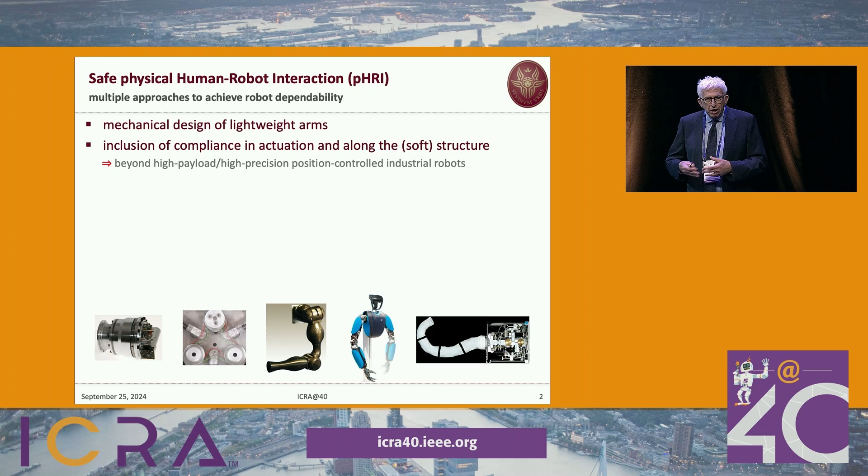Over the years, as robots started going out of the cages of industries into homes or service applications, there have been many attempts to make robot behavior safe. We can list mechanical design of lightweight arms, a few examples below, inclusion of compliance in the actuation, even variable stiffness actuation, and along the structure a soft structure. By and large, all these activities were moving the traditional way of looking at robots—position control, high payload, high precision—to a more compliant, more natural behavior.

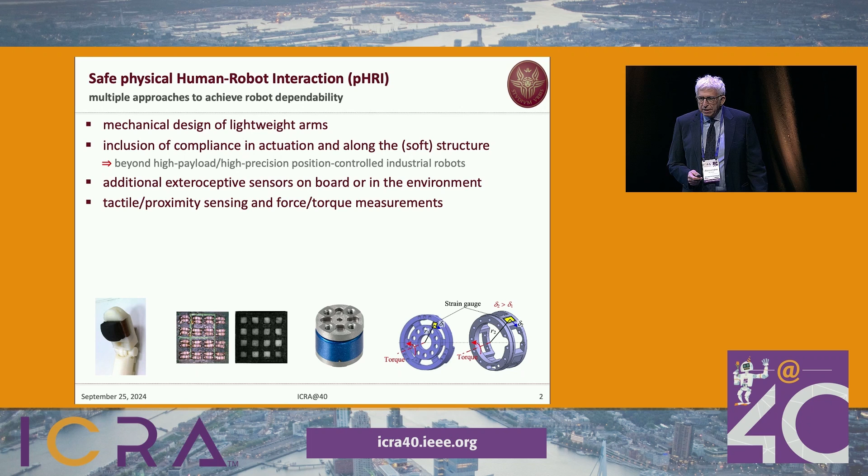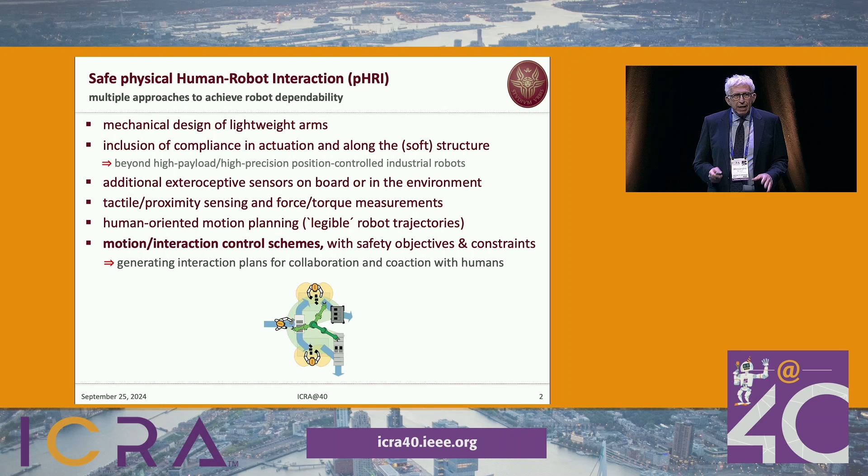If you want to live in an unstructured environment, you need exteroceptive sensors on board or in the environment. If you want to touch the environment with a robot or a human, you need proximity or tactile sensors and force measurement. You can integrate all of this in your system. Another important fact is the planning of legible motion—this is an activity done very well by CNRS LAAS—so that the human can understand what the robot is doing. And this is what I'm going to talk about today: motion interaction control schemes.

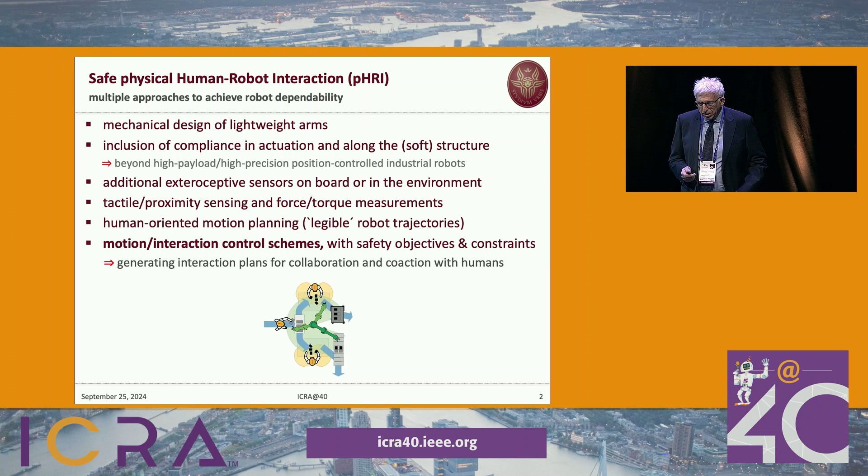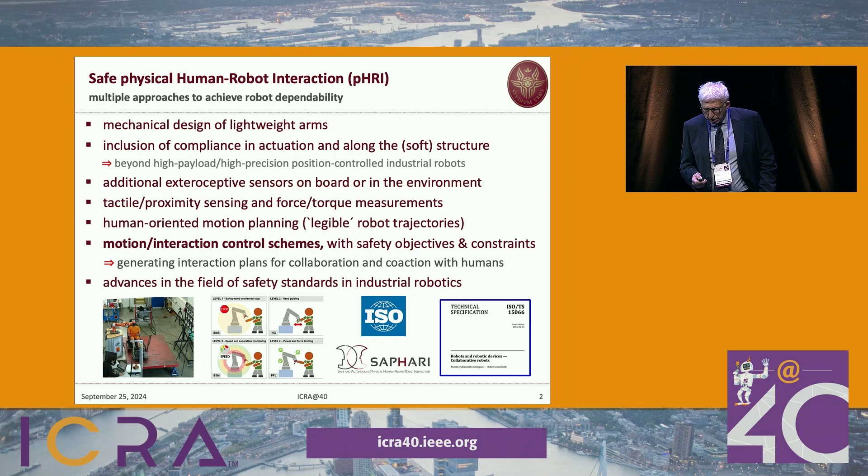Of course, there are techniques that include safety constraints and safety objectives. I will do, let's say, conventional engineering stuff, hopefully good enough for solving our problems. I must say also that over the years there have been advances in the definition of safety standards which allow the robot to interact more closely with humans, and the SAPHARI activity produces some contribution on that.

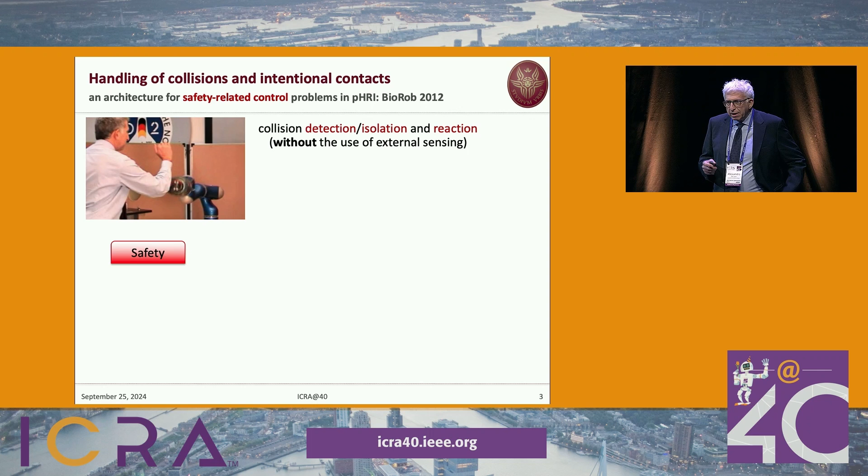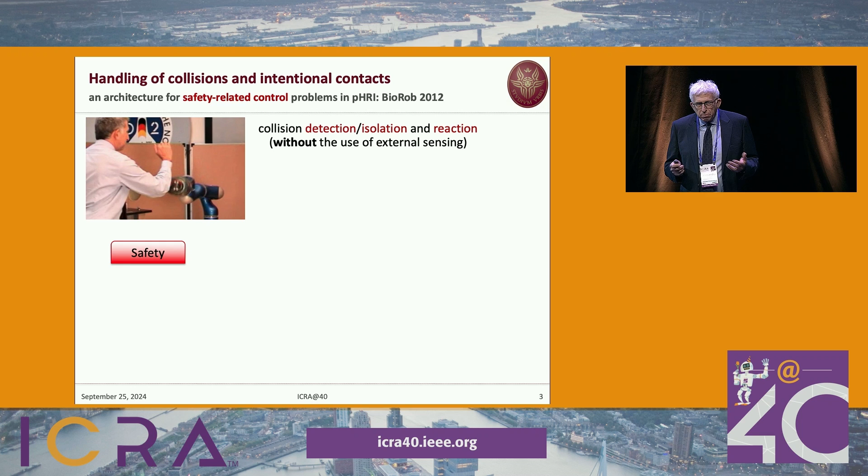Over the years we've set up a control architecture handling three different problems related to safety, which for us are really control problems. First of all, safety is very important, which for me means being able to detect collision as soon as possible, to isolate which link has collided with the environment, and then to activate a reaction of different kinds. We would like to do this without external sensing—only the position sensor could be used in this case.

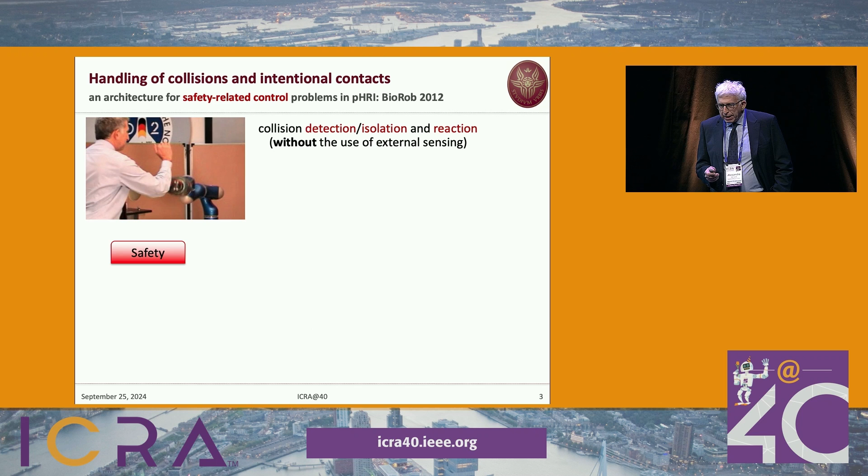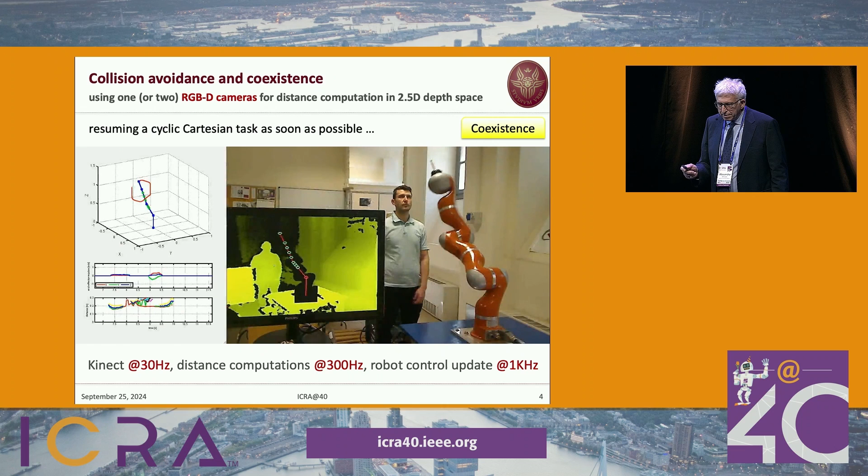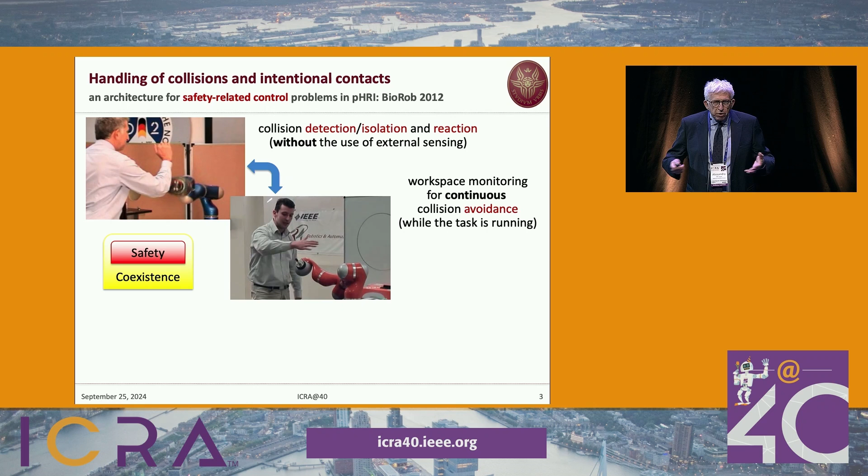Now the second aspect—sorry, there's some delay—the second aspect is what we call coexistence. So 90% of the applications of collaborative robots in current industry, at least in Italy, are concerned with coexistence: robot and human sharing a workspace, interacting very little, like pick-and-place objects left by the robot and taken by the human. For this we need external sensing because we need to measure distances and do collision avoidance in the traditional way. So we call this coexistence. Of course, if we are focused on coexistence, we don't have to forget safety.

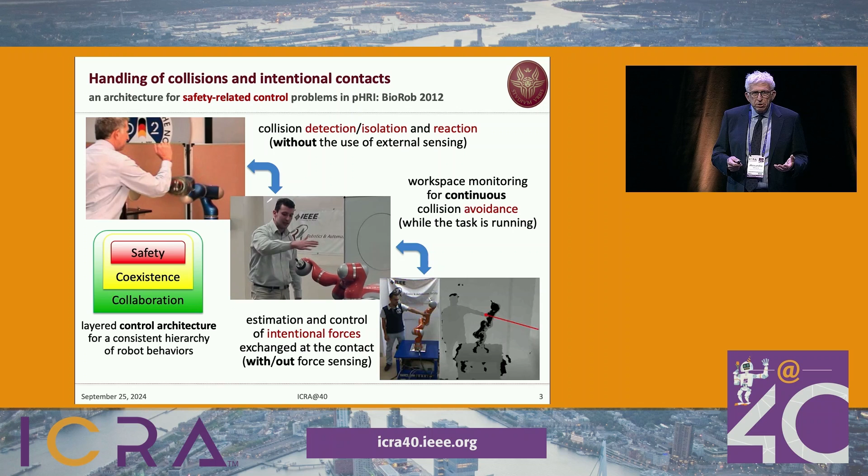In this sense, we have a hierarchical structure of architecture, because the next step is collaboration, when we really exchange forces and have to do this in a controlled way with the environment, with the human—with or without using sensors, as I like to sing, 'with or without you.' All this has been set up into a layered control architecture. Let's see some examples.

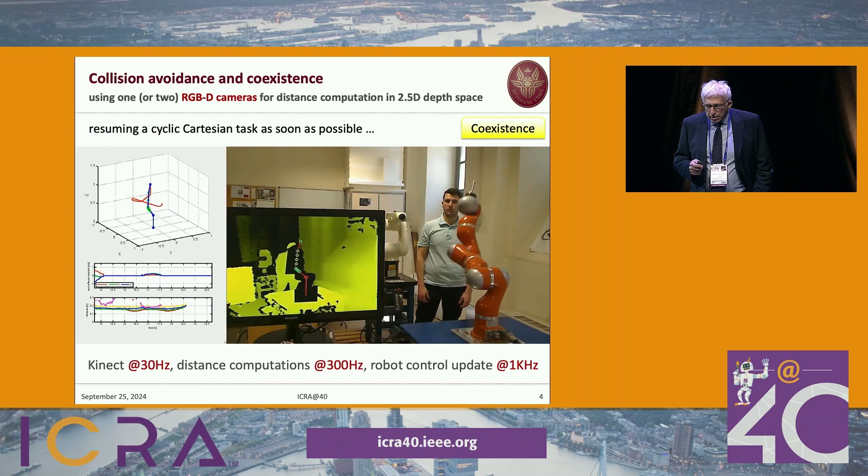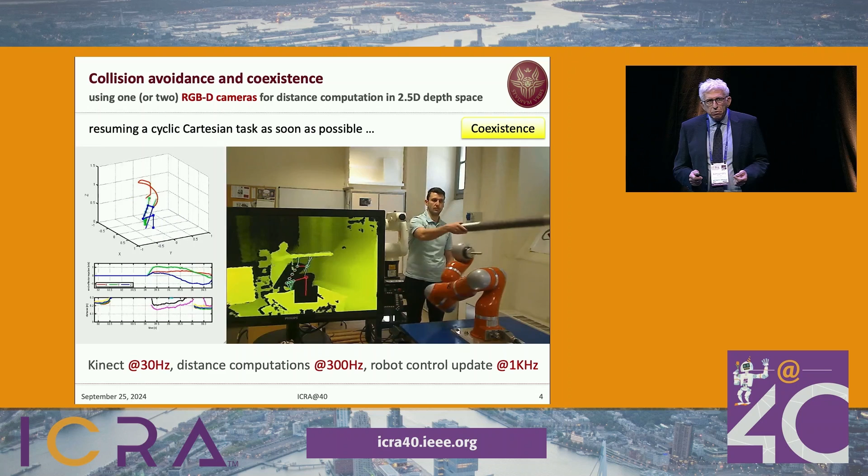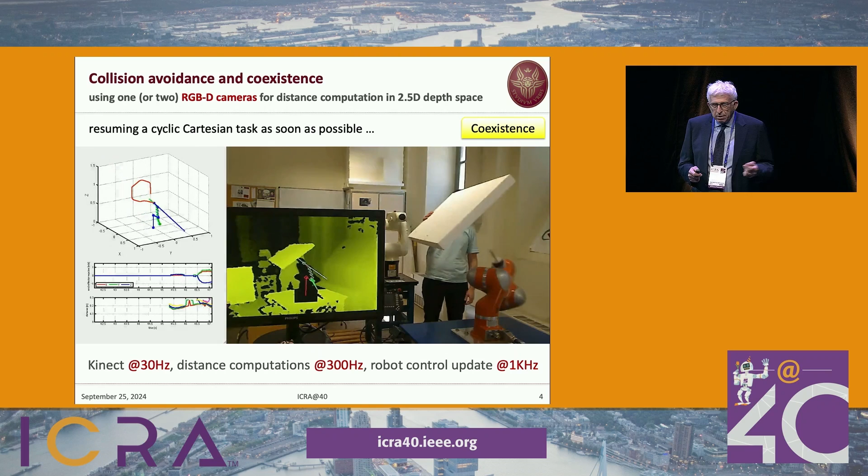For instance, for coexistence, this is work by Fabrizio Flacco—unfortunately he's no longer with us—doing experiments where the robot performs a cyclic task in the Cartesian world, and we use a Kinect, sometimes two Kinects, to limit the gray zone in the workspace. We do distance computation in the sensor space, so we don't build point clouds, which is why we can go quite fast, and of course we update the control law every one millisecond on a KUKA.

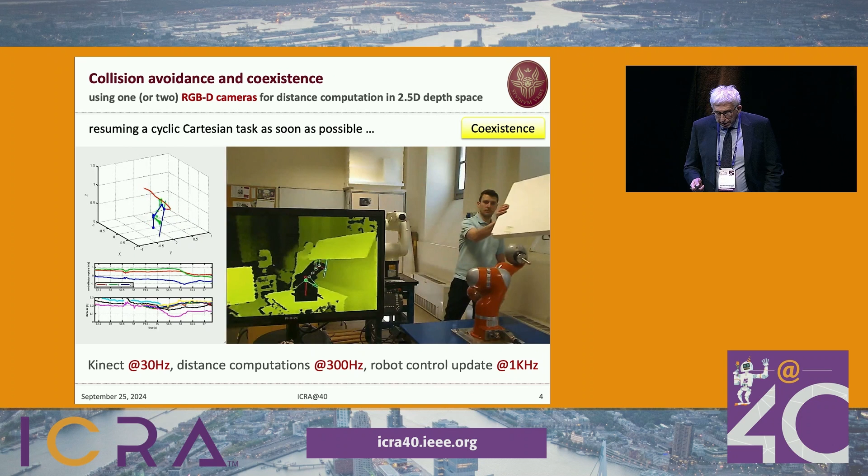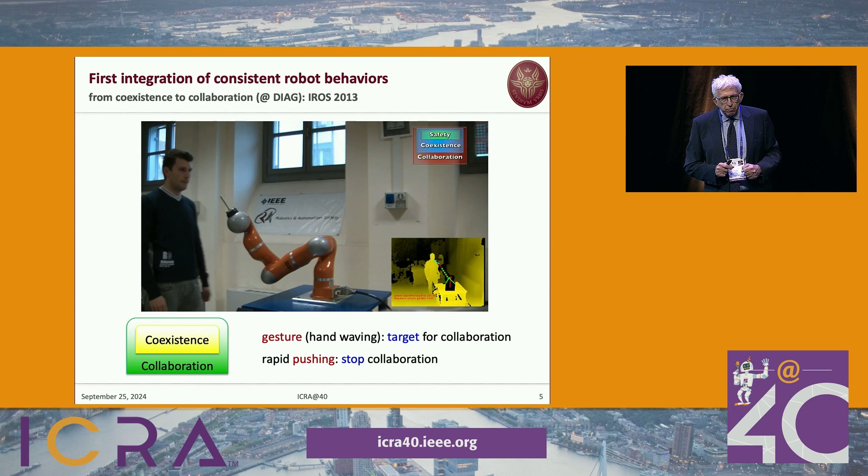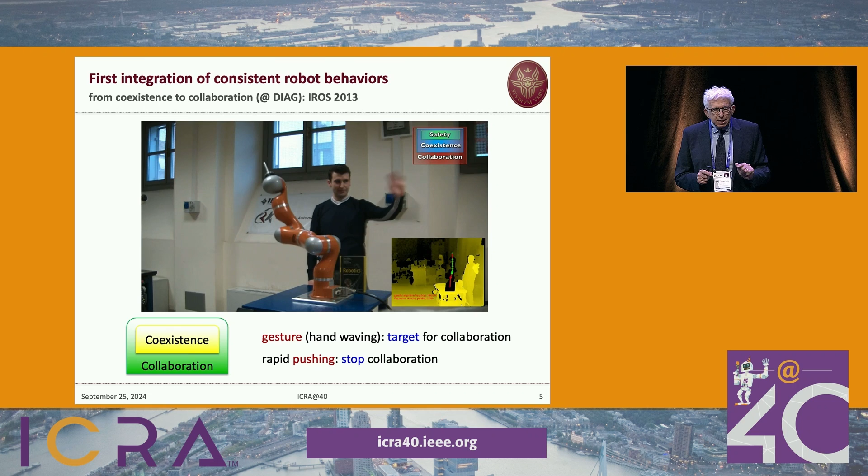So now if you want to see the integration of this with collaboration: here again, you can hold the end effector and control exchanged forces. Then you give a target, for instance doing a gesture or a voice command, and the robot goes to this target because it wants to collaborate. But coexistence is still important, so all other parts of the human body are avoided.

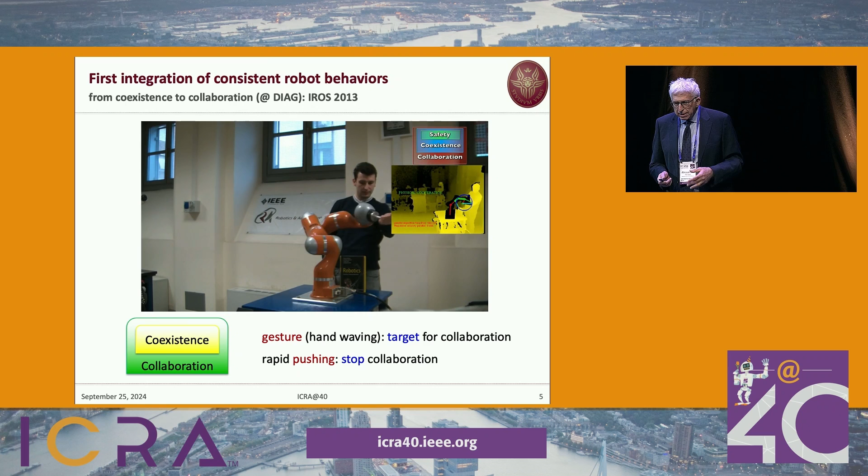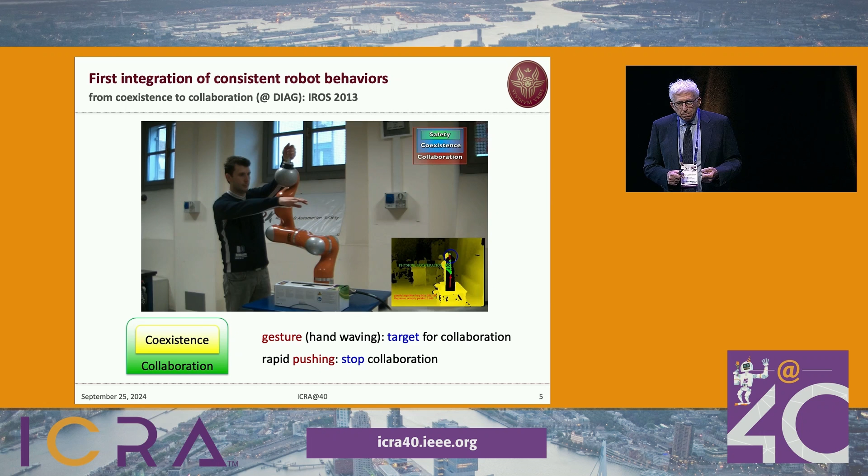And you can see this is done with the human body, but also with any other obstacle in the environment. I think the last part of this short video is more impressive, because Fabrizio is holding the tip and pushing against his arm, but the robot becomes stiffer and stiffer because coexistence should be preserved, and safety as well.

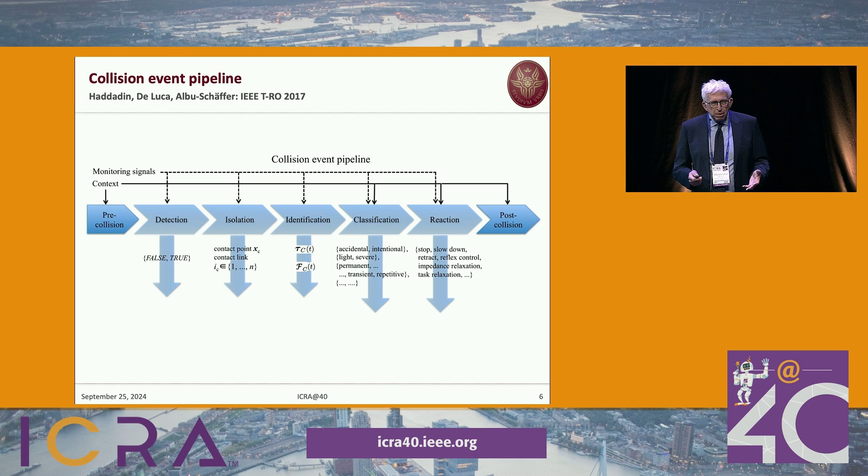So now talking about safety: in 2017, after many years of collaboration, we finally published this paper with Sami and Alin on TRO, giving this collision event pipeline. Safety here is detection, isolation, and possible identification of the exchanged force.

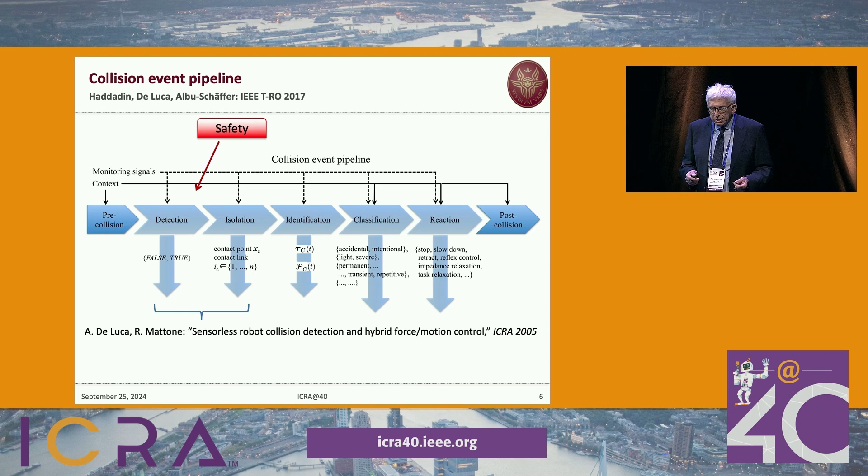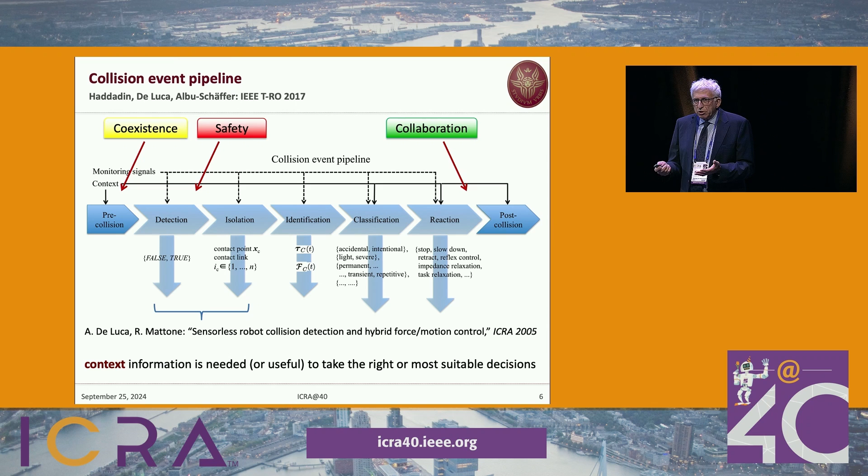The part related to coexistence comes before, and collaboration comes at the end, when the robot should react. Sometimes it just stops, sometimes it starts an active collaboration with the human.

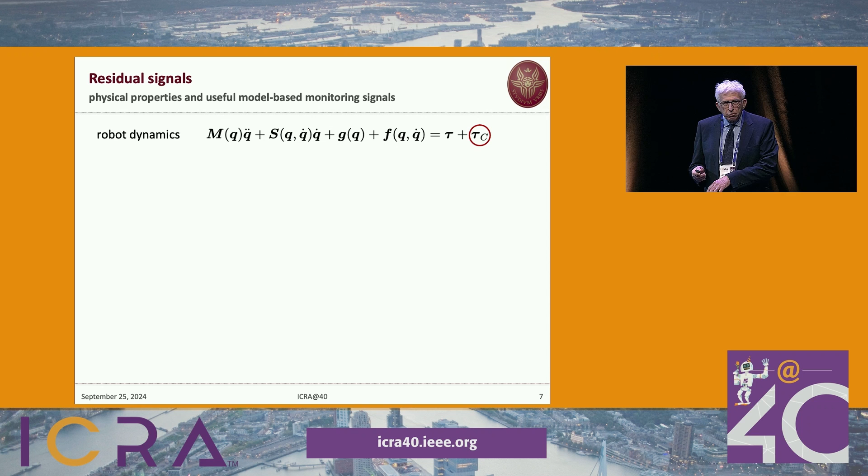So this is the only mathematical slide that I have. Robot dynamics is known to everybody. Tau C is the joint torque resulting from a collision, occurring anywhere at any time along the structure of the robot. We use two physically motivated signals: the total energy of the system, and the generalized momentum.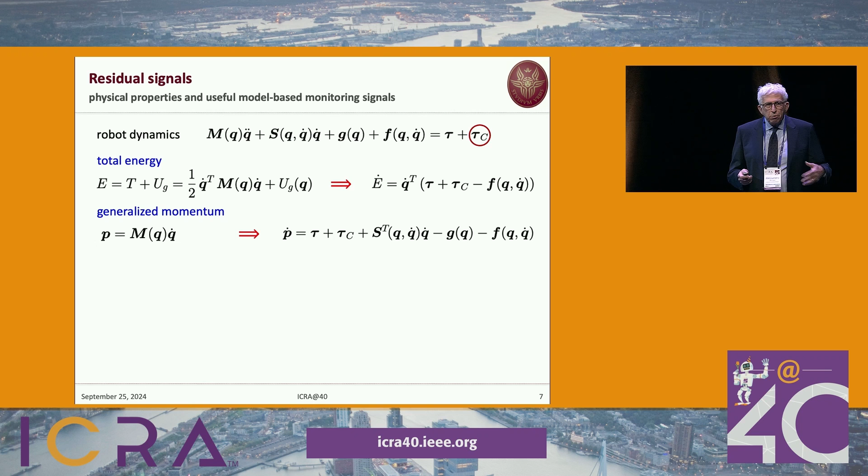Now you can write how these two quantities evolve. One is a scalar, one is a vector. Based on this evolution, you can design computable signals to monitor collision. The sigma is a scalar used for collision detection, and r is a vector residual used also for isolation. Their evolution is sensitive to collision.

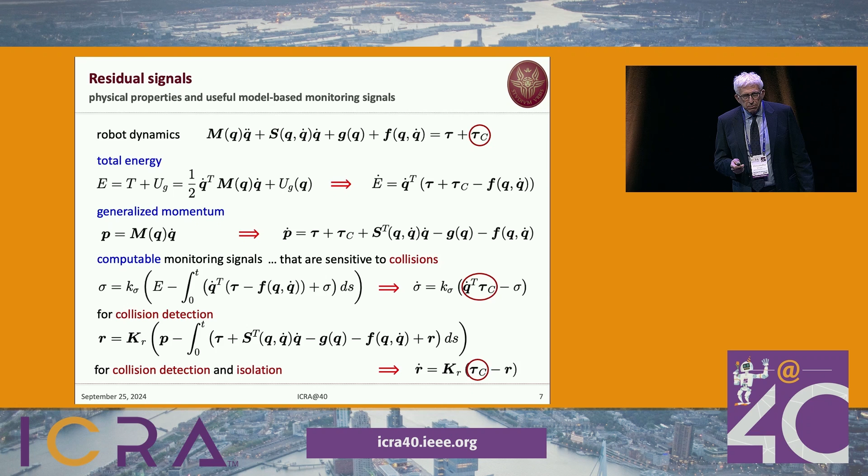With this, you can set up a behavior of the robot. You have a collision monitor always active, and you can detect or isolate, using both signals at the same time. When you overcome some threshold, the collision is detected, and you activate reaction strategies—there are many you can use. The nice thing about these signals is that if the contact is removed, they come back to zero, so you can continuously monitor a succession of contacts with the environment.

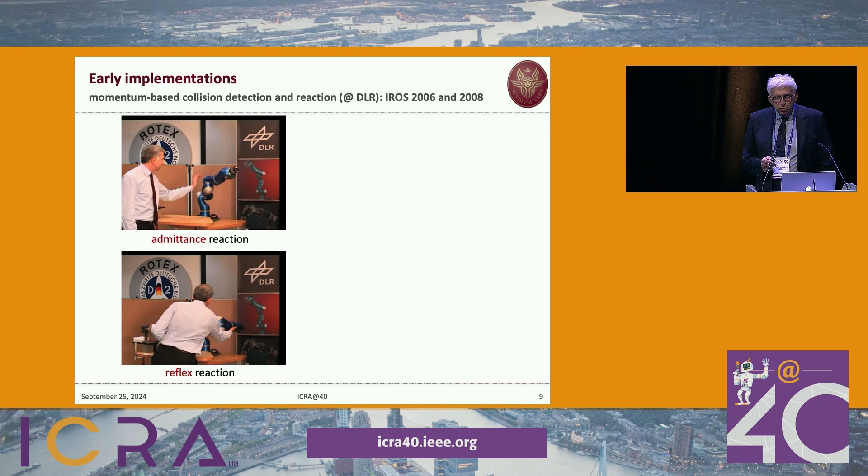So here is the first implementation of this type of idea. The first one was at DLR, during my sabbatical—these are the first impacts, with two different types of reaction. One is an admittance mode, where the residual is converted into a command in Cartesian space, a velocity command. The reflex reaction instead is a torque-controlled reaction.

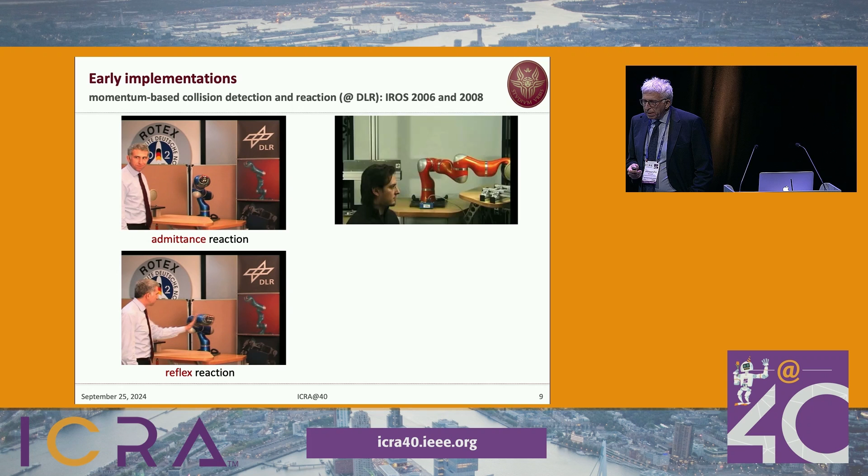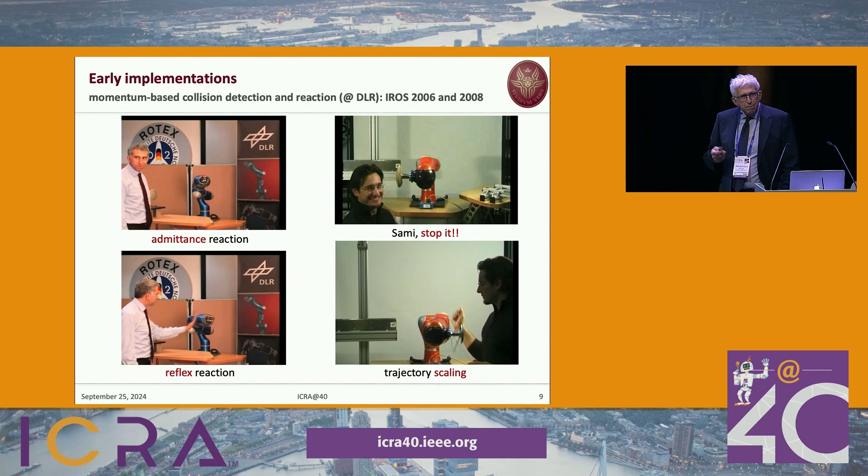And of course you are familiar with this famous experiment—Sami was very confident about the software. You can use the same techniques to evaluate, keeping the same path but scaling the trajectory. And if you push too hard, then you get a reflex and the system moves away.

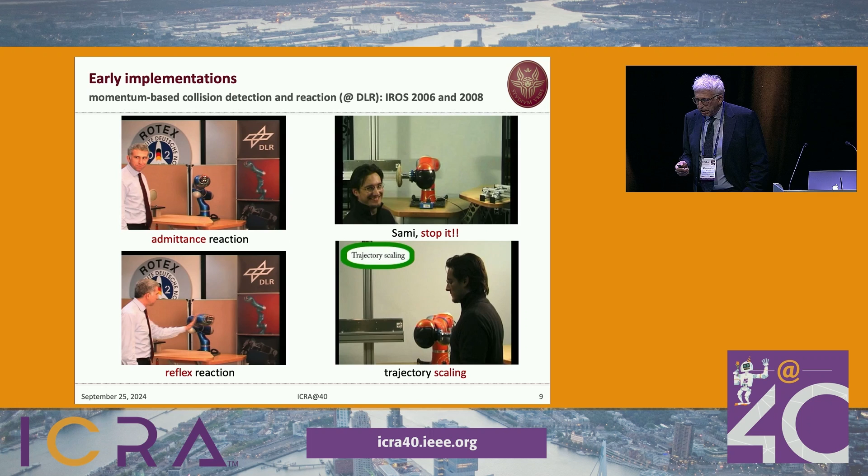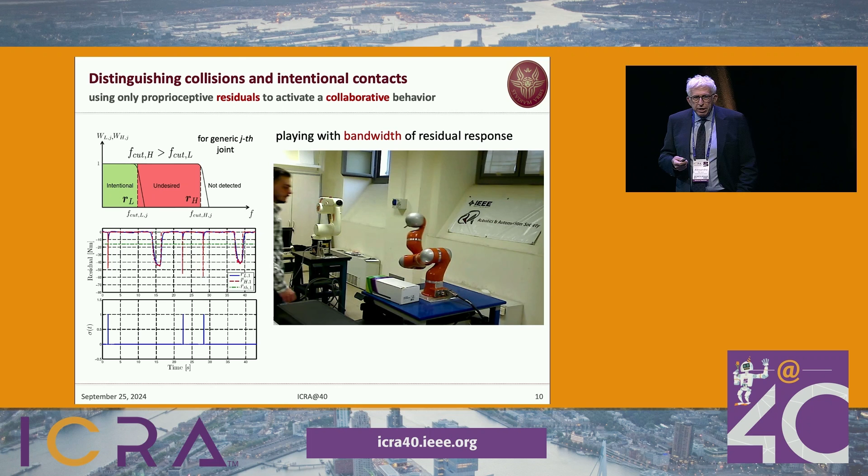Another important thing is to discriminate whether the contact is intentional or not, because if it's intentional it may lead to a collaboration phase, but if it's undesired, it's a collision, and the robot should simply stop or react as before. We did that by filtering the residual signal differently—a high band filter and a low band filter—allowing us to discriminate collision, where the robot stops and then resumes operation.

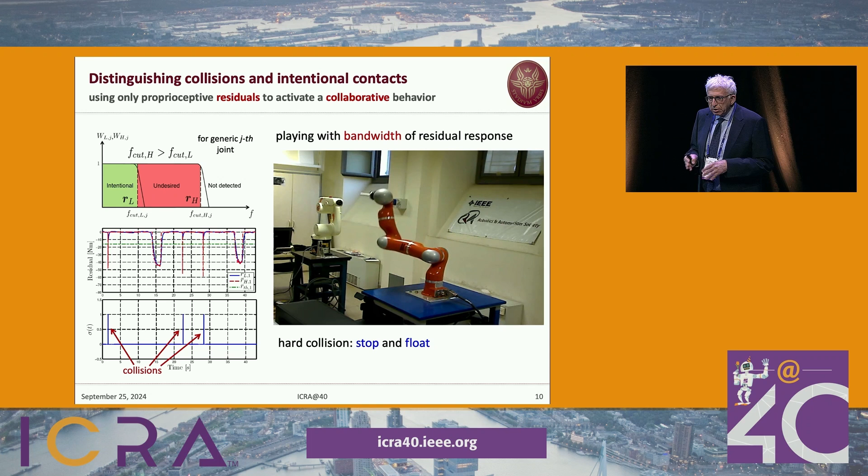Or collaboration—this is a soft contact, and from there on we are controlling the exchanged forces no matter where you're touching the robot. This is very important.

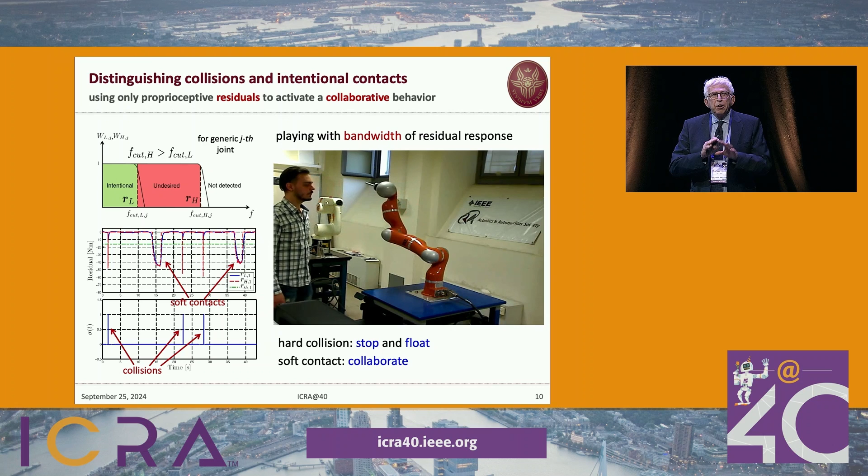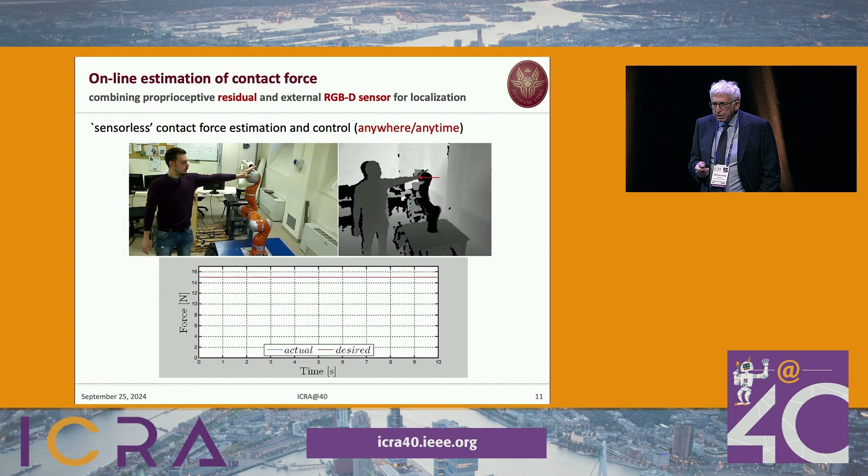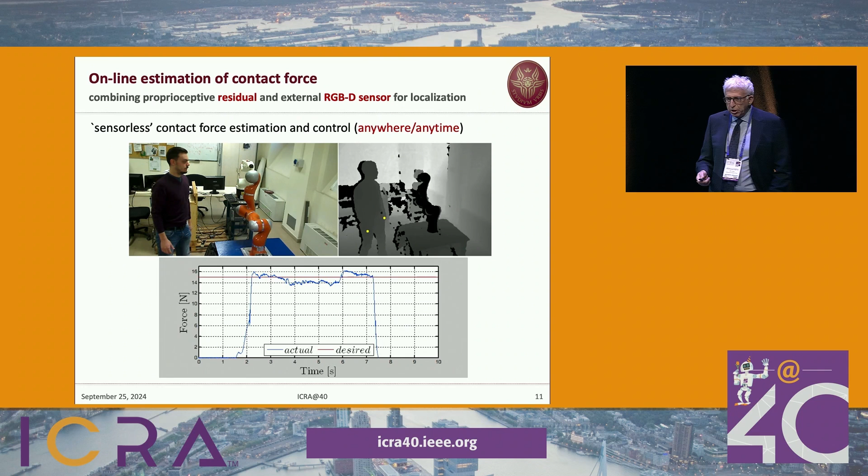So are we really regulating the exchanged forces? This is important. This is a result from ICRA 2015, where you can see we set a 15 Newton force in that direction, and the robot keeps contact whether you're pushing too much or too little, regulating the exchanged forces.

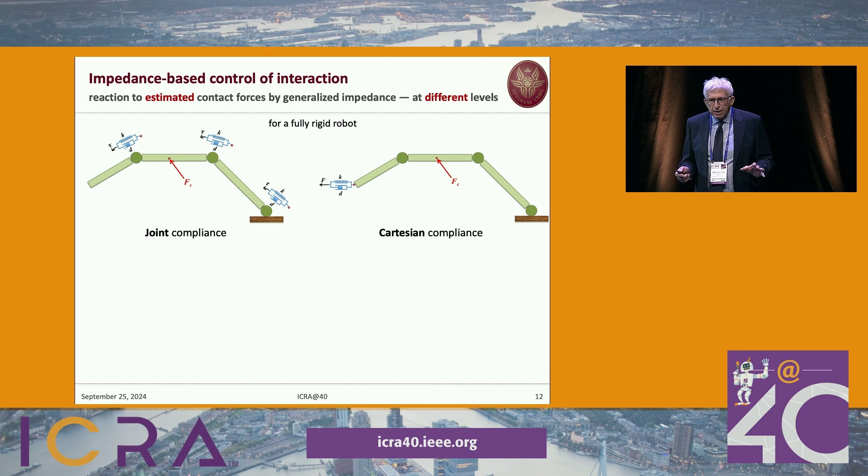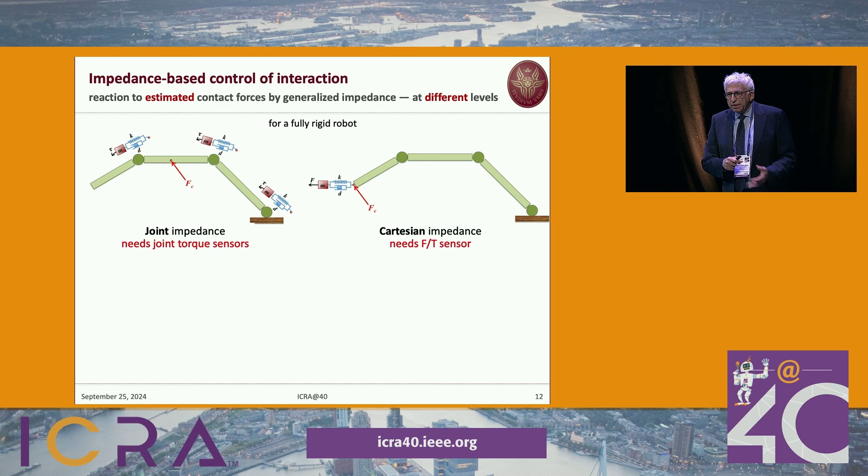Once you have this estimation, you can implement any interaction controller you wish: admittance control, impedance control, hybrid force velocity control. For joint compliance or Cartesian compliance control reacting to forces applied anywhere, you don't need to estimate the force. But to achieve impedance control, you need either a joint torque sensor or a force torque sensor, because you have to modify the apparent mass of the system.

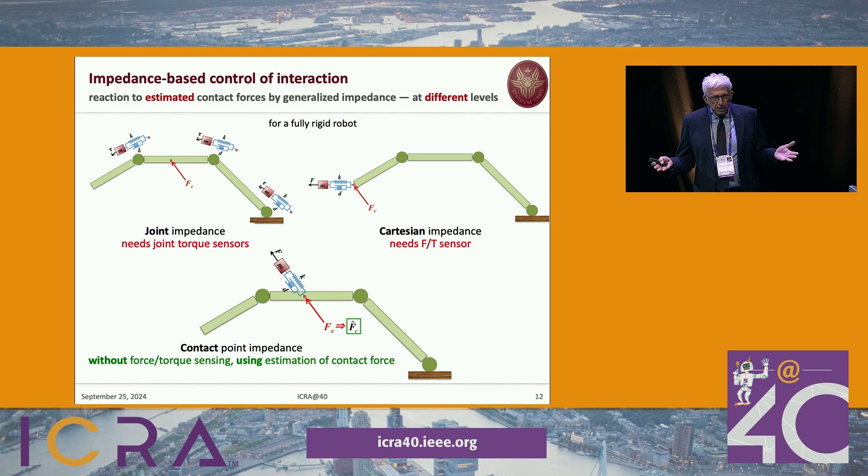In our case, we don't have this force sensing. We are estimating force and reacting to this estimated force as if it was measured. This could happen at any point in the structure without the need of a tactile sensor or other external sensing.

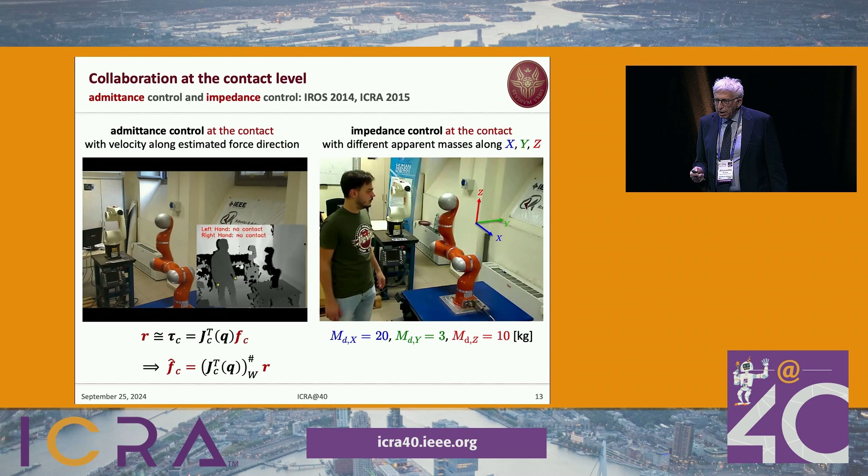So these are some examples of this admittance control. We are using a velocity command for the robot, or a torque control. And of course, you can also play around with this residual.

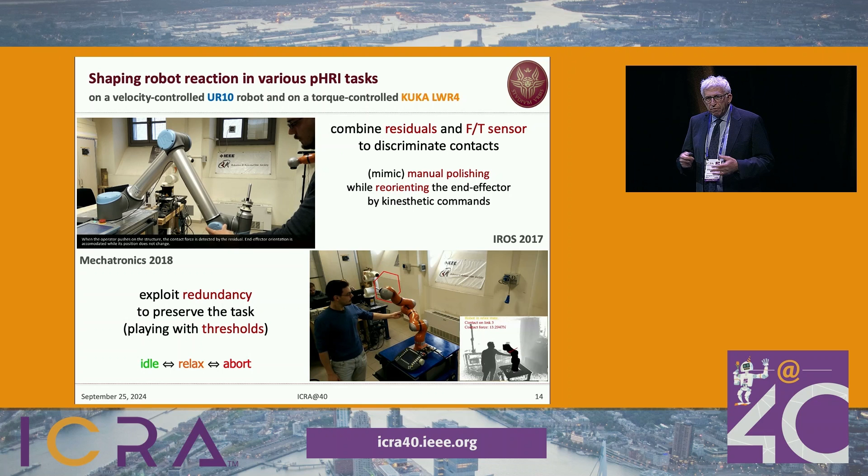Here we combine the use of residual with force torque sensing, and we are able to discriminate the type of interaction. This is mimicking manual polishing on the end effector, while the reconfiguration in orientation is done just by pushing, a kinesthetic command.

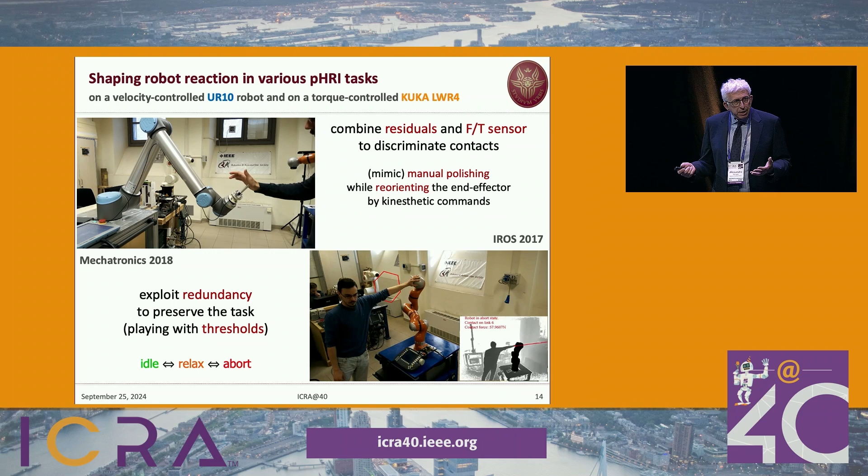Or you can use redundancy of your system so that you react to the contact without relaxing the task. If the contact is too hard, then you relax the task, and so you can achieve a hierarchy.

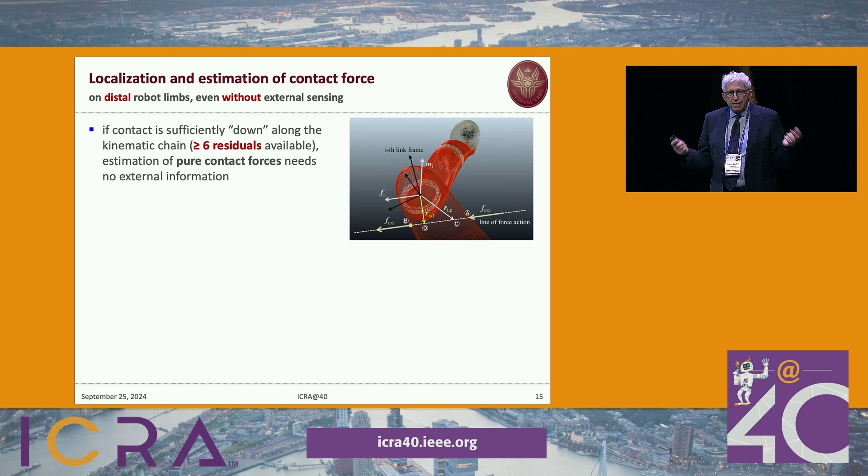Now, I'm almost done. So when things happen distally, when a contact happens at the 6th or 7th link, then you can use the residual also to estimate the force, without any information from outside saying where this contact is.

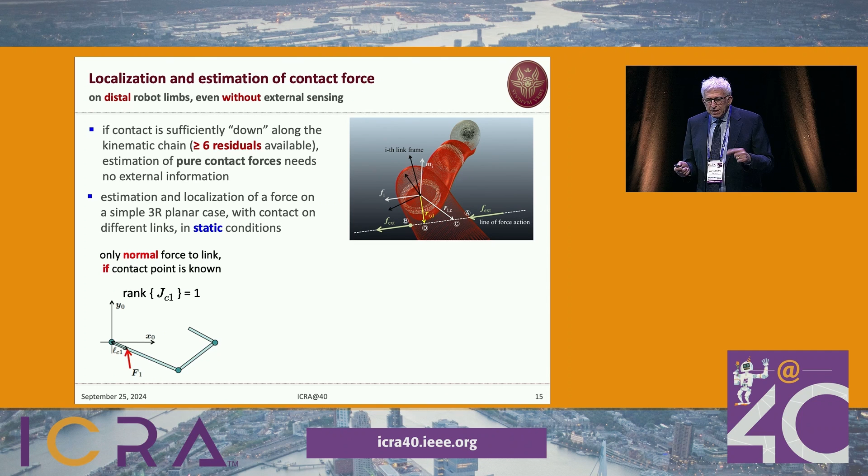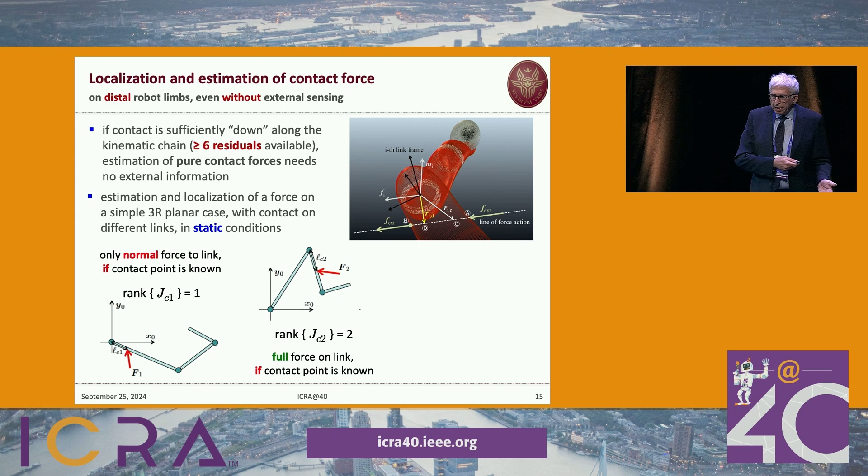Unfortunately, you can't always get what you want, so there are cases where you cannot do this, as shown by this simple example. If you hit a 3R planar robot on the first link, you can only estimate the normal force to the link if you know the contact point. If you interact at the second link, you can estimate both components of the force, but you should still know the contact point. If you go to the third link, then you can really recover the whole information.

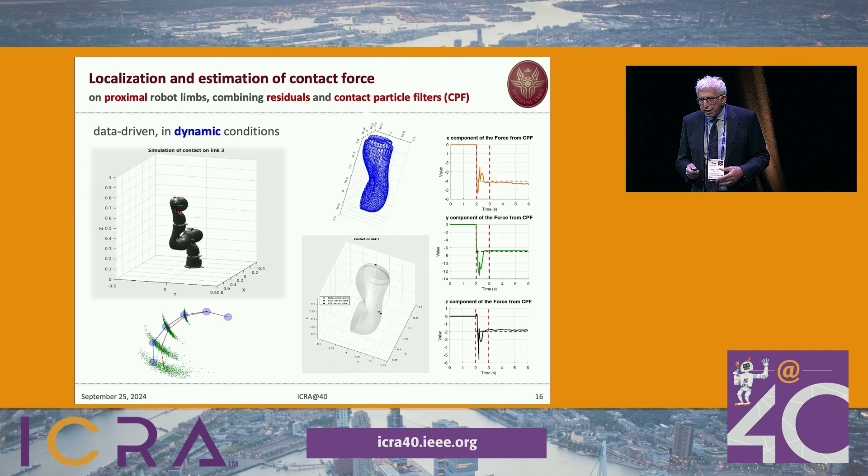And if you're working on the proximal link, the one close to the base, then you should use dynamic information. We implemented the contact particle filter, proposed by Russ Tedrake, which is a data-driven system. You can really identify also the contact point, even if you're contacting the robot at the base.

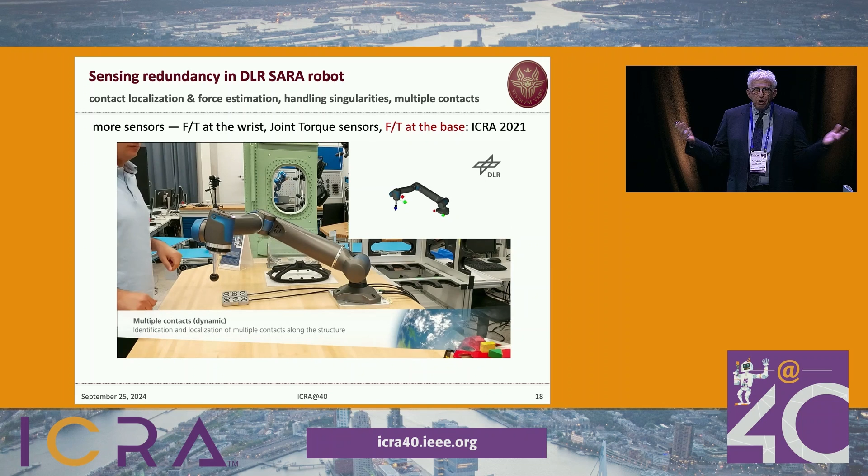Indeed, if you have extra sensors, like with the SARA robot, with a force torque sensor mounted at the base, you can do a lot of nice things. But we try to be conservative in the use of hardware.

So summarizing, so far we have presented physically motivated methods for detecting collision. I call it sensorless because we are not using extra sensors. These methods can be applied to a variety of robot systems, including joint elasticity, link flexibility, humanoids, floating-base systems, UAVs, and so on. It can also be applied, and we did it, in closed control architectures of industrial robots.

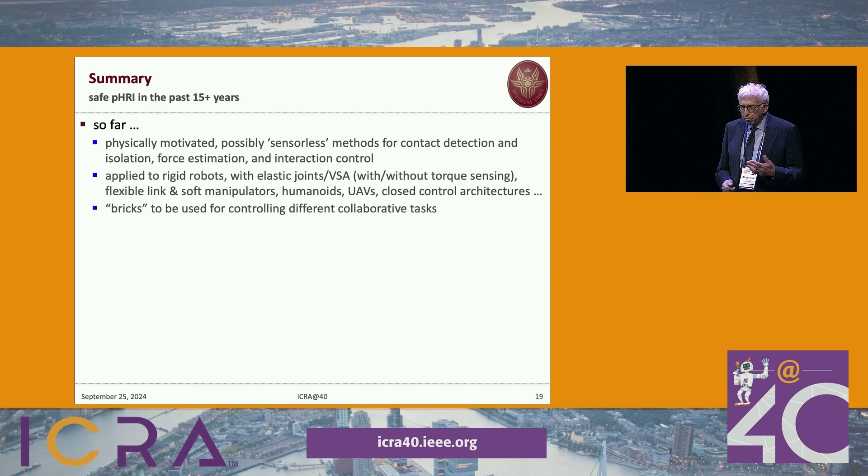I consider this just another brick in the wall, a simple element that can be used together with other methods. In fact, in the near future, I foresee the integration of data-driven and model-based methods—model-based methods used in data-driven systems and vice versa.

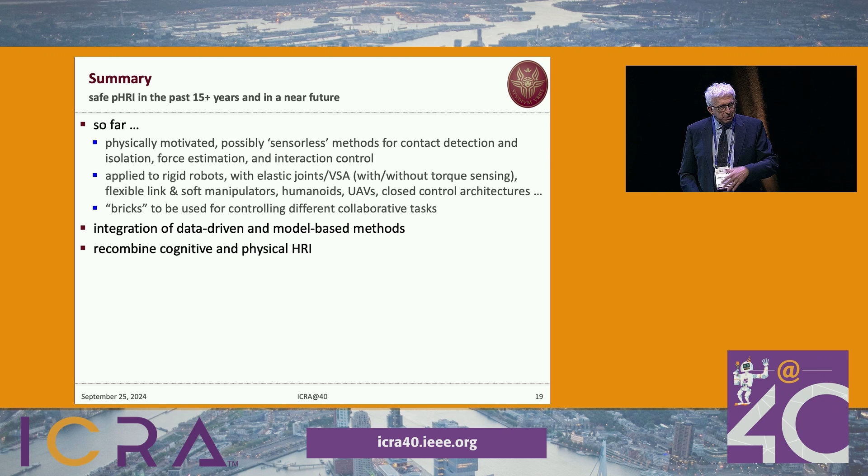Also, I've talked about physical aspects, but cognitive is equally important. Multimodal communication in different ways is also very important here, and human intention prediction is a very active field—this depends on the context. Anticipative action would provide more ergonomic behavior with the human.